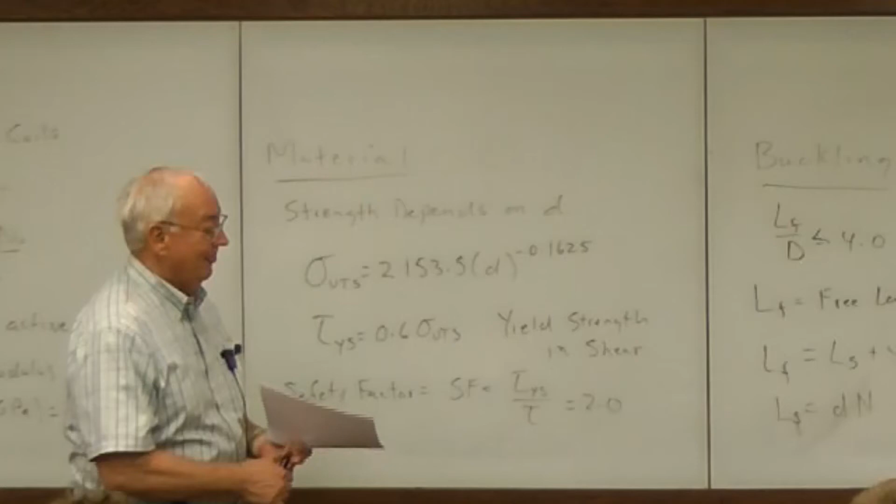And what you want to do then in yours, it's all on that handout, and everything is okay except for the LF over D part. What you want to do is do this.

Given we want to take a force, don't hurt yourself with that.

Another kind of spring we have is called a torsional spring, which is like a mousetrap, rat trap. I sometimes pass that around to my class, but I'm always worried they're going to hurt themselves on a mousetrap. They don't usually, but I have to warn them here as well.

Be careful. Anyway, force is 500 newtons. All SI here.

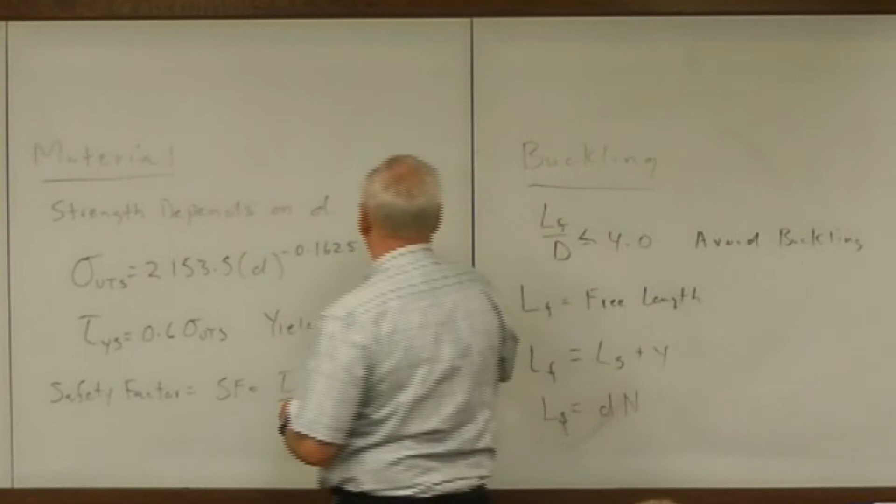Deflection is going to be 50 millimeters. And music wire is the name of this material. This one over here is music wire.

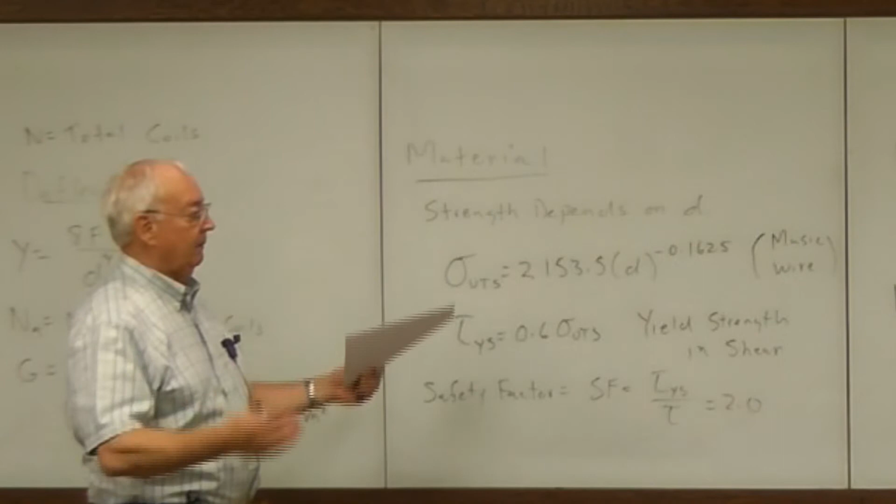The strength equations vary with the different kind of wires. They're different kind of wires. Music wire is a wire they use on kind of the smaller springs, up to about 5-6 millimeters. Now, that big spring looks big, but its diameter is only about 6 millimeters. So if you'd have a spring with 10 millimeter wire, it's a huge spring. Something you might have in a truck or something.

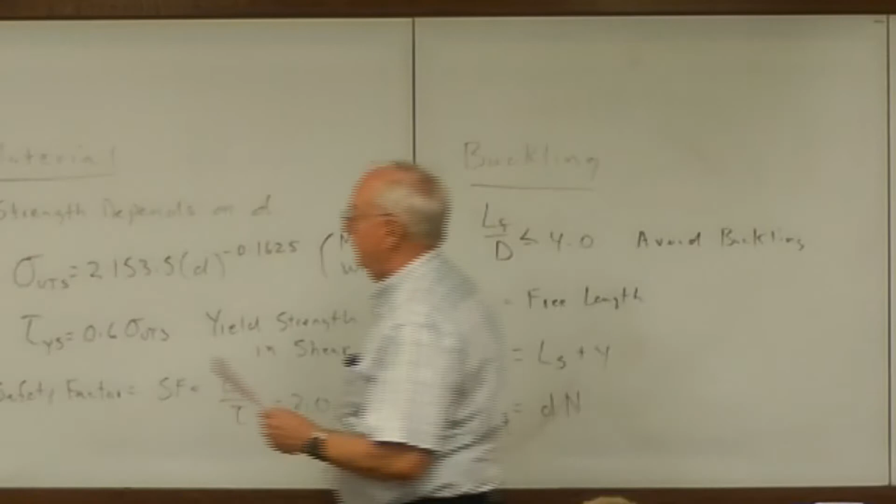Anyway, back to this. Plain ground. Plain ground ends gives you this. Plain ground, that equation. And the other thing is avoid buckling.

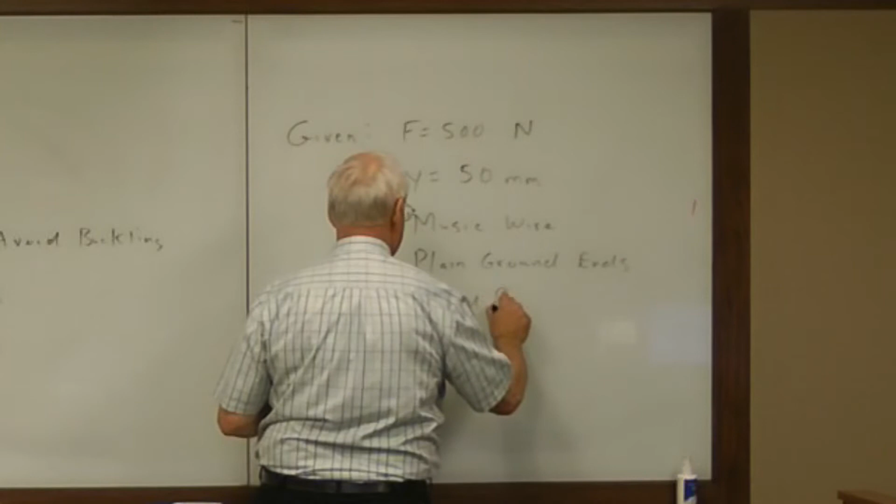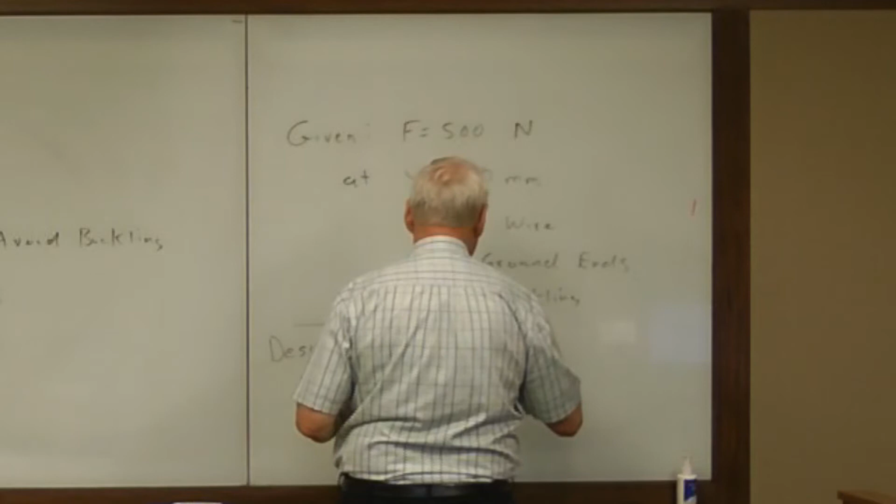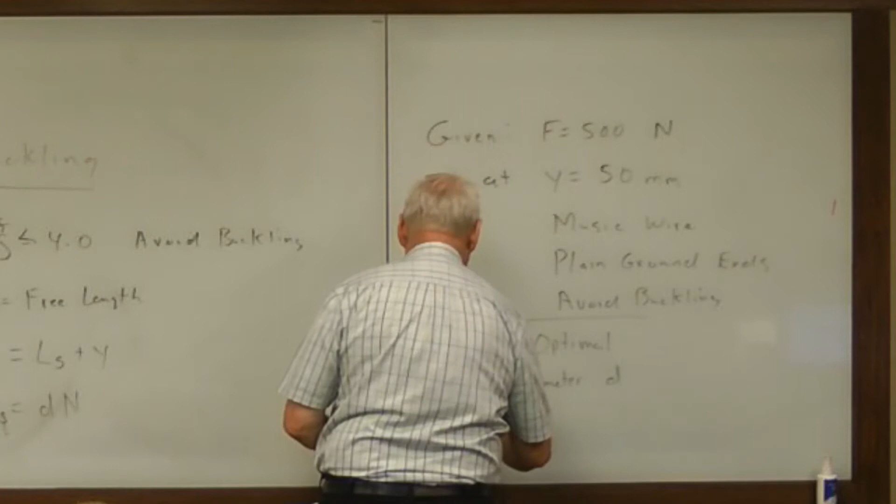And now here's what you have to do. What do you call optimal? For optimal, the wire diameter, little d, coil diameter, big D, and free length, LF. Those are the three things, only three things.

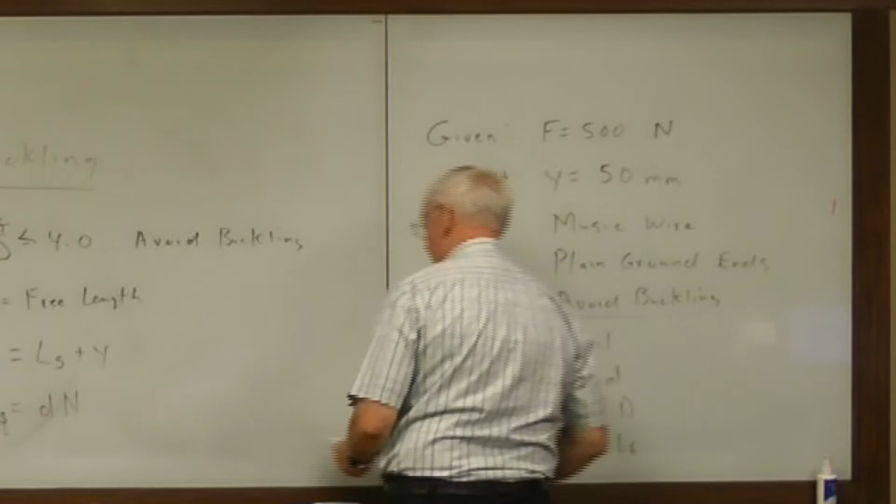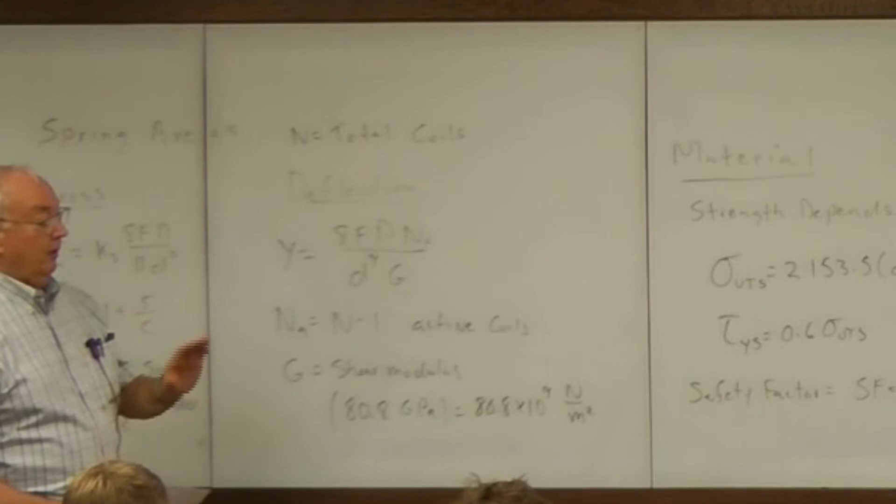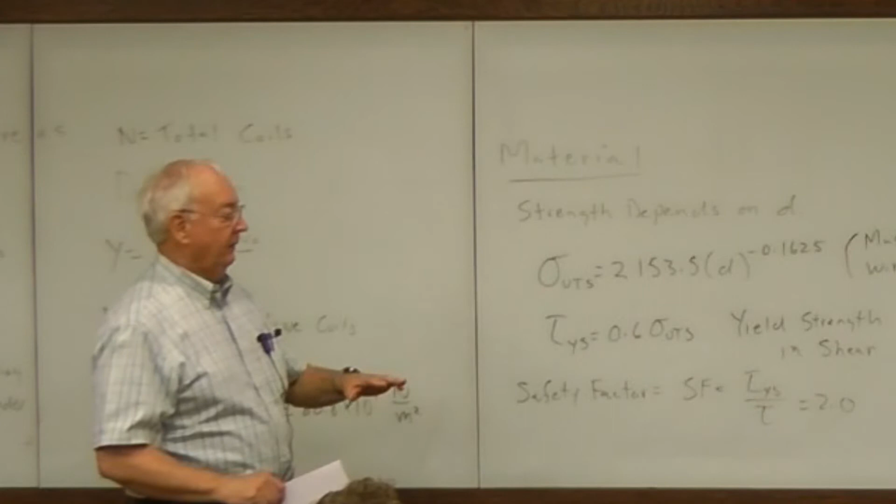But reviewing this again, they are interchanged a little bit. Okay, the wire diameter, little d, going to set the strength. So if the thing isn't strong enough, you got to make it bigger, little d. If you make a bigger little d, you lower the strength. So on one side it helps, and the other side it hurts. So that's a problem for optimization.

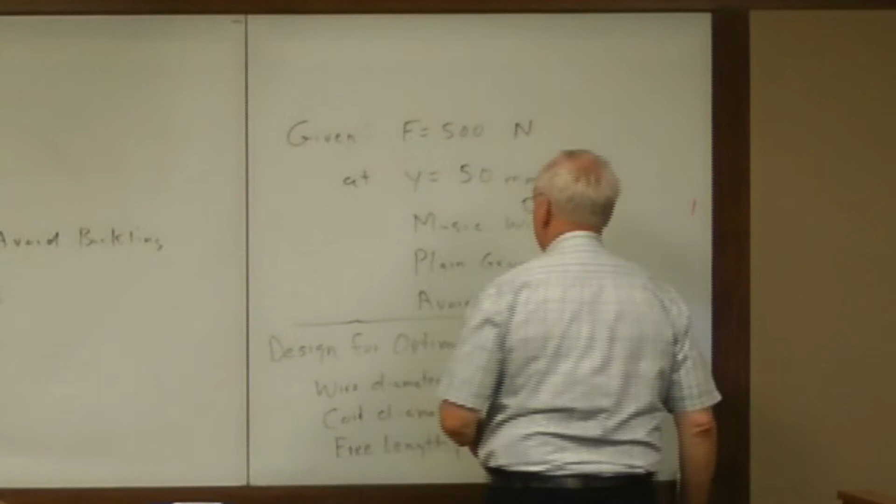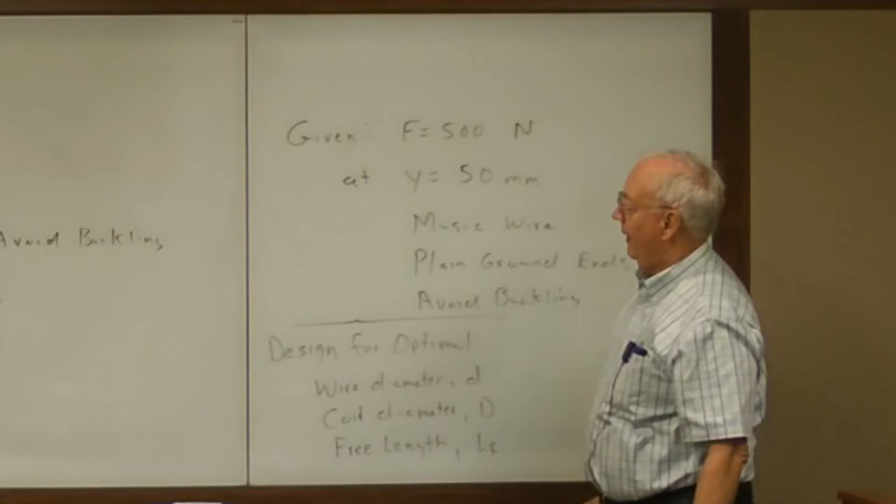So the little d tells you how much load you can bear. Obviously at 500 newtons, you can't have something as small as a hair, like 0.5 millimeter, and you're not going to need something huge, like a big truck spring. 500 newtons, by the way, is a little more than 100 pounds if you're not familiar with SI. So it has to be somewhere in the middle there. So you have to design that wire diameter that fits all these strengths.

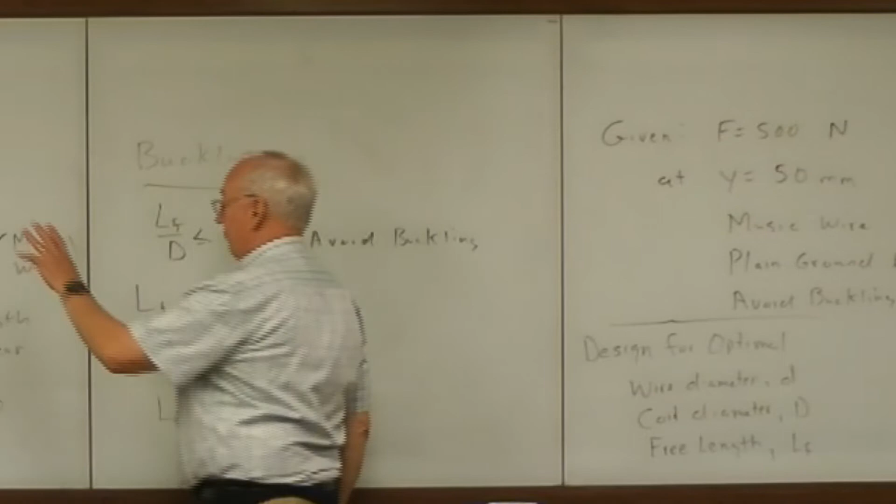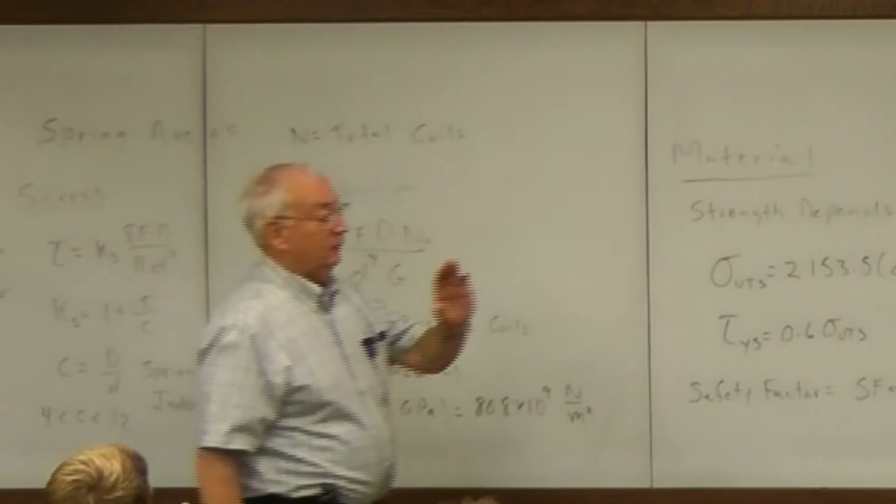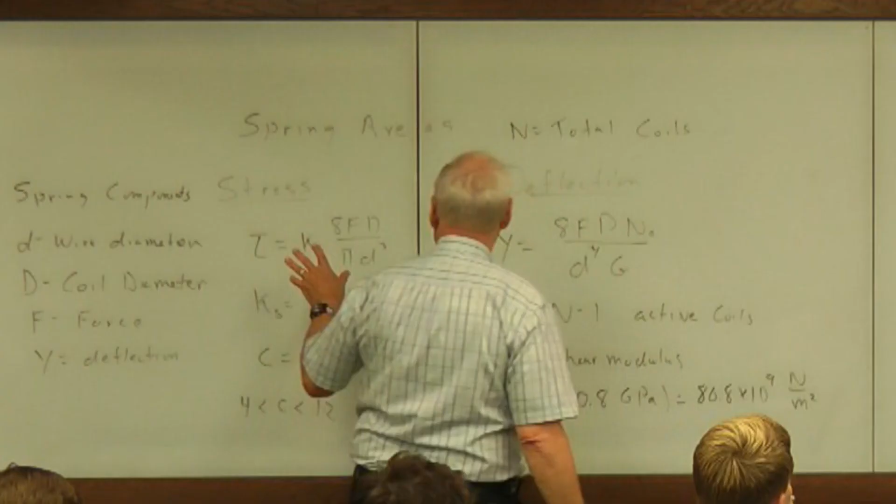And then the coil diameter impacts both the stress and the deflection. You have to make the deflection come out to about 50. If in your optimization you're off a couple percent one way or the other on one of these, it's okay. But you have to do that optimization to get the right deflection. So it depends on that.

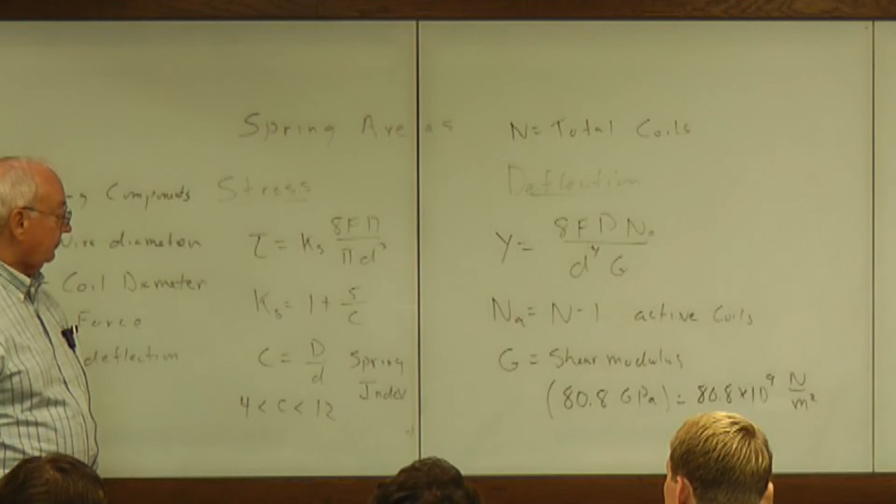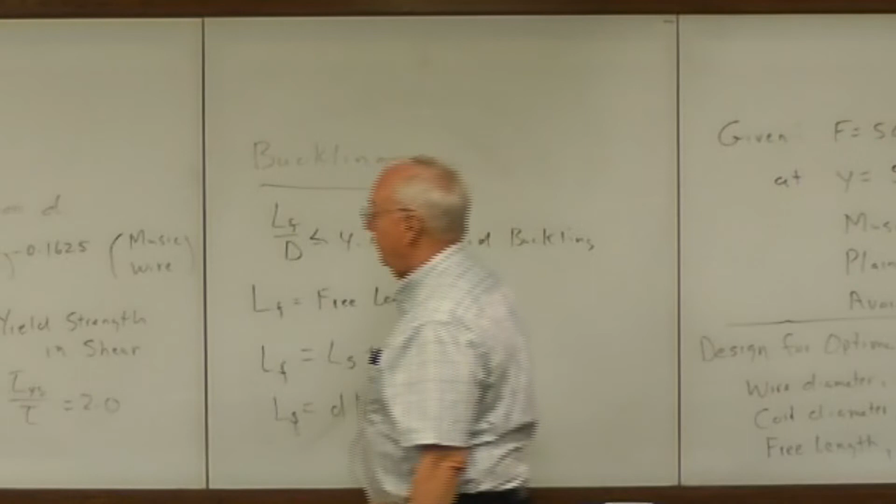The big D to little d ratio is constrained within that bracket. And let's see what else. Then you want to design a free length. So the bigger you make the free length, the more deflection you get, but the more likely it is to buckle. So it's a problem. It's going to buckle if you make it too big.

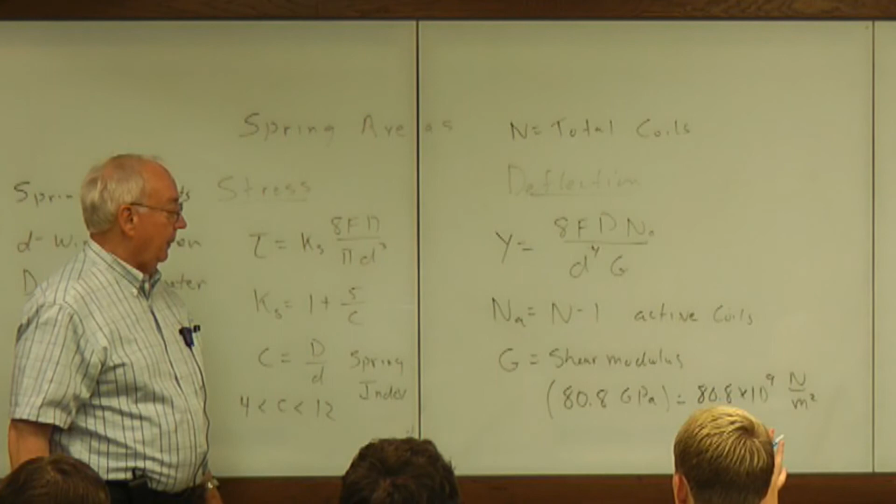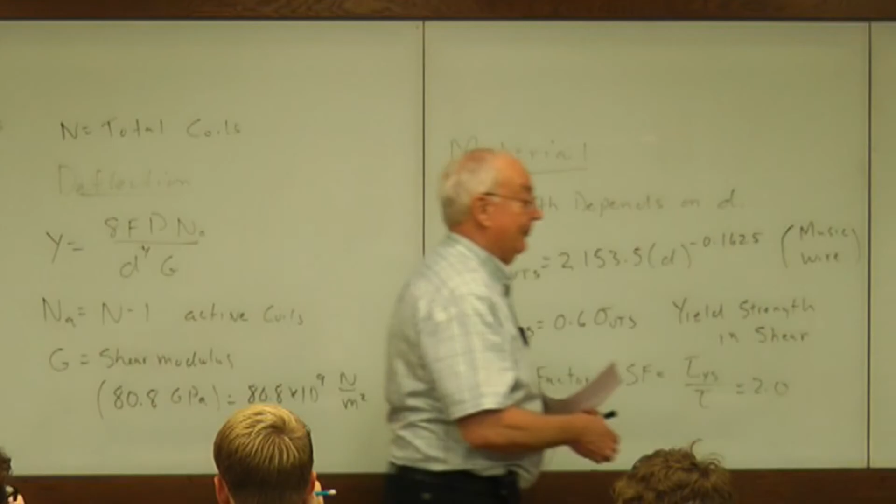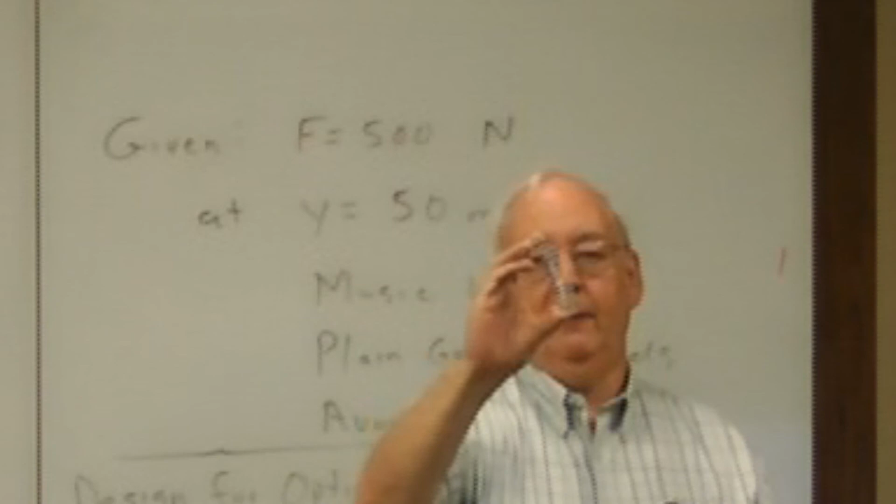I can show you when I get those back what I mean by buckling. So you don't want to make it too big or it buckles. Here's a spring that I'm going to try to depress in compression. If I'm not careful with buckling, it comes out like that. It just bends over. That's a classical mechanics failure mechanism, buckling. And anything in compression can do that.

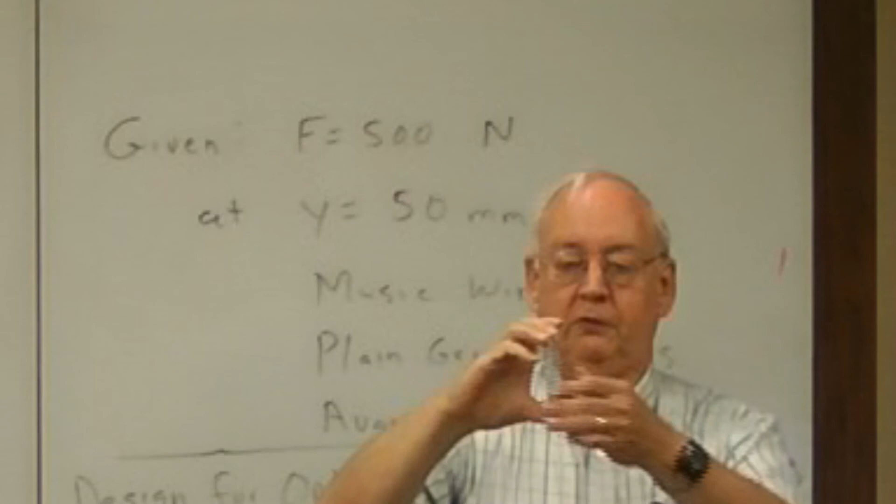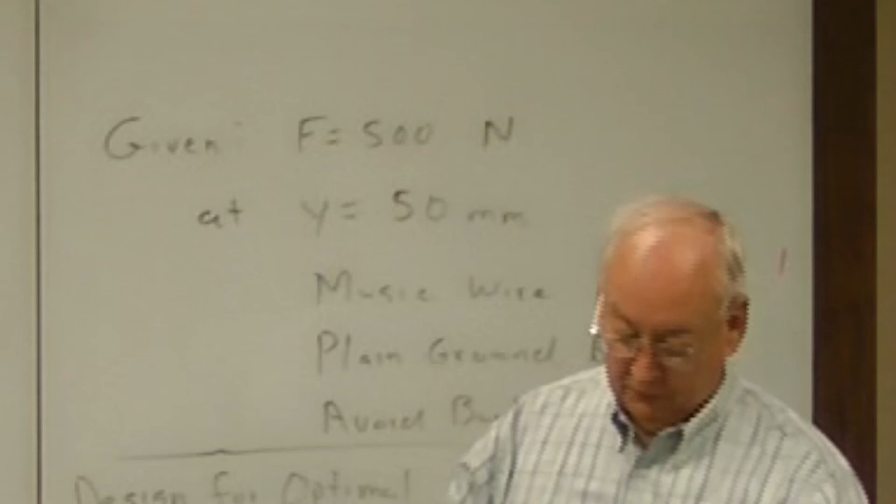And once it buckles, it loses its strength. What you want is for it to stay straight. Now, you can hold it with your hand, but you're not going to be there to hold springs for the rest of your life. So you want to design it so it doesn't buckle. These little jobs, that buckles pretty easily. So that's the last criterion, that you want to design against buckling.